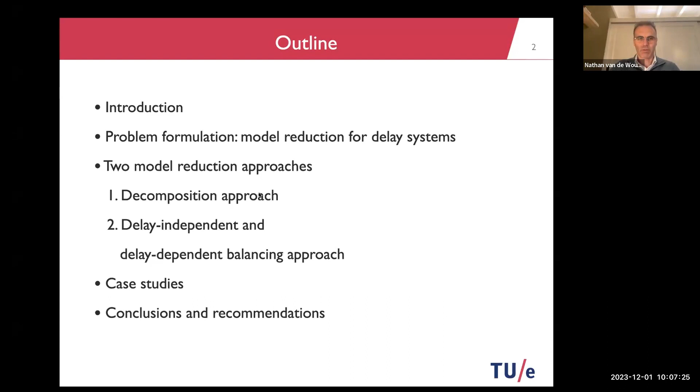One of them is manufacturing systems. High-speed milling and turning processes have been studied a lot in the scope of delay systems. I've been working quite a bit on drilling systems, which delay enters in exactly the same way, namely through cutting processes. In drilling systems it's at the bit, whereas in high-speed milling, it's the cutting process between tool and workpiece.

Another example that I've been working on a lot is networked control systems, where the delays enter through communication delays, for example between actuators and a controller, or between sensors and a controller.

Then in the drill string, you have high-dimensional models, for example, coming from spatial discretization of wave equations describing the vibrations of the drill string.

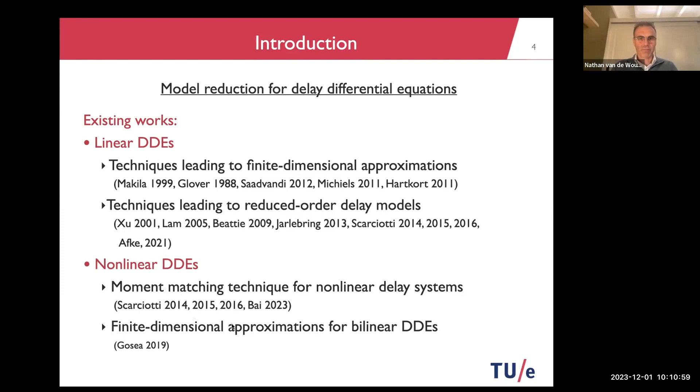Now, let me sketch the high-level problem that we want to tackle. We want to pursue model order reduction for delay differential equations, mostly focusing on linear retarded DDEs with constant delays, but also discuss some small extensions to a class of nonlinear DDEs with time-varying delays.

What is essential to us is that we want to preserve the delay nature of the system. We also want to preserve stability properties of the original system during reduction, and we want to provide an error bound, which means we want to be able to say something about the quality of the reduction.

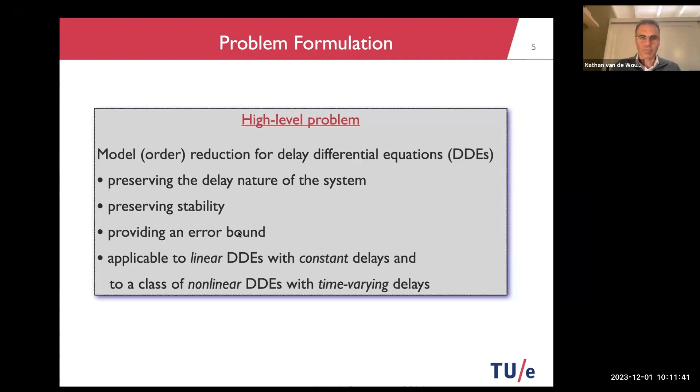Okay, then I want to discuss two distinct balancing-based approaches. One is a decomposition approach, which first separates the delay part from the finite dimensional part of the dynamics, and then actually employs reduction techniques for finite dimensional systems. And then still we'll try to say something about stability preservation and error bounds for the reduced delay system.

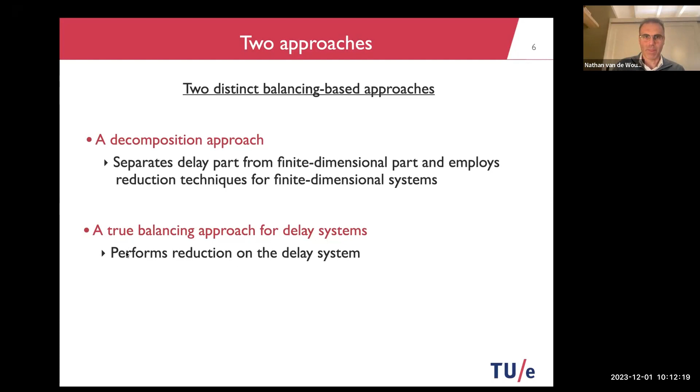Secondly, I want to discuss what I would call a true balancing approach, which really performs reduction directly on the delay system itself. Now, this decomposition approach, if you're interested, you can find more information in these papers, in which also Bart Besselink and Wim Michiels were involved.

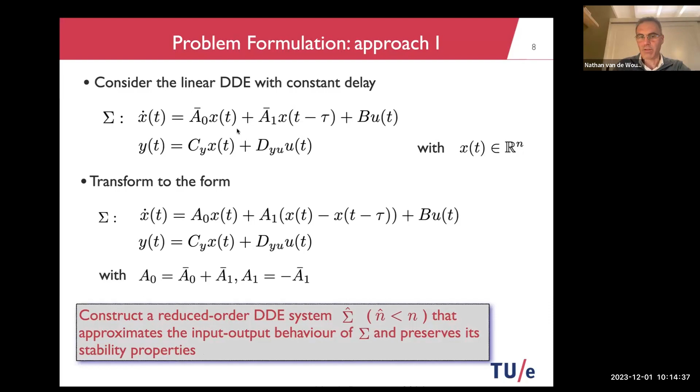Okay, now let me go back first. So what we're going to do first in this decomposition approach is to rewrite this linear DDE in terms of a feedback interconnection between a finite dimensional LTI part and a delay operator part.

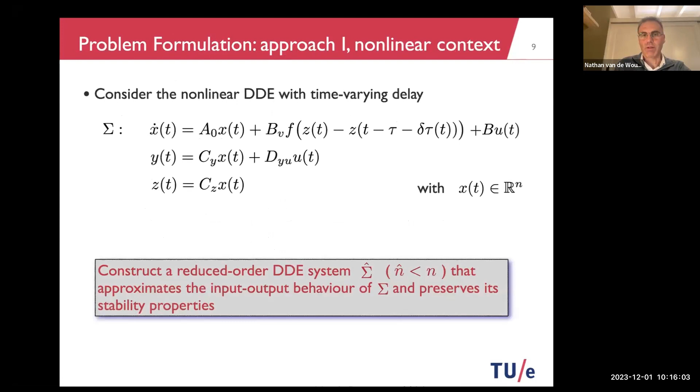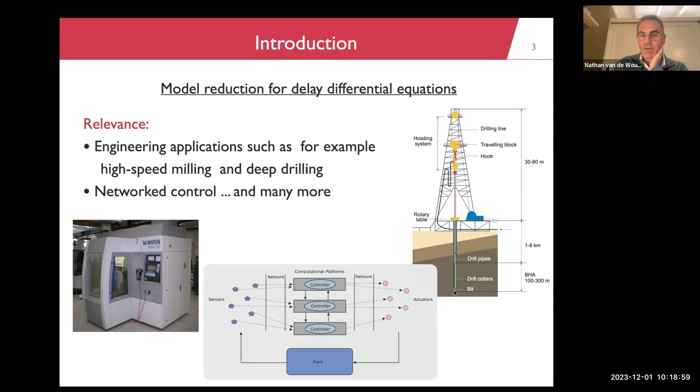So this actually inspires this approach where we only reduce a finite dimensional linear part and leave intact the nonlinearity and the part that induces the delays.

Excuse me, Nathan. Hello, this is Emilia. Sorry? I have a question. Probably I have missed something in the previous slide.

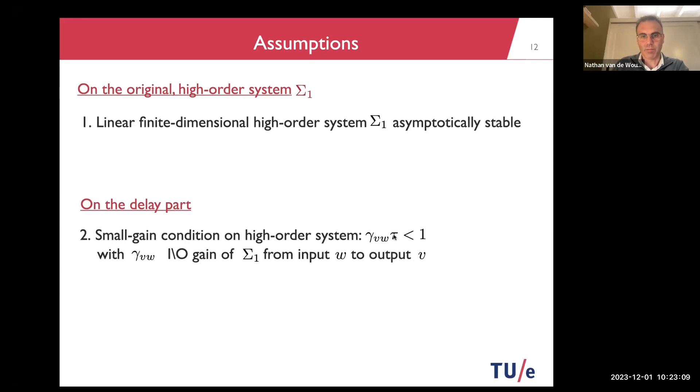The second condition is a small gain condition: gamma VW times tau is smaller than 1, where gamma VW is the input-output L2 gain of this finite dimensional part from input W to output V, and tau is the gain of the delay operator block in the linear case. So this is a small gain condition for this loop.

In the nonlinear case, we need a small gain condition of this form, where instead of tau you have L times tau plus square root 7/4 times mu. This involves L, the Lipschitz constant on the nonlinearity F, and tau plus this term is a gain bound for the time-varying delay operator, taken from literature, where we assume the time-varying delay has in absolute value a bound mu.

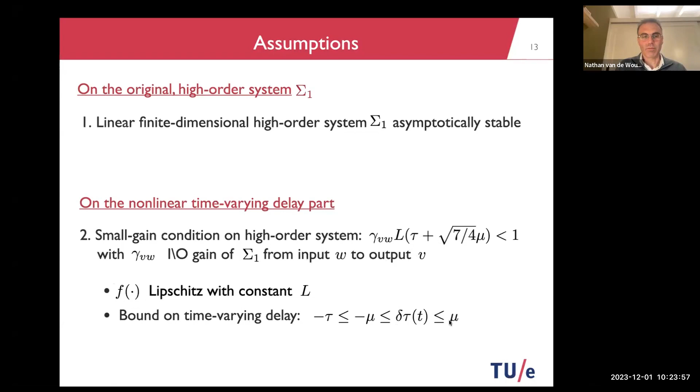This slide says more assumptions, but actually these are more conditions that we can easily satisfy. The third condition is that the linear finite dimensional reduced order system is also asymptotically stable. If you use standard balancing techniques, this is immediately guaranteed.

The fourth condition is that for this reduction of the LTI finite dimensional part, there exists an error bound. Here it's formulated in an incremental sense, but for linear systems that doesn't matter. Let me explain what this means.

These operators F are just operators from inputs U and V to either output Y or output W, so from both inputs to both outputs. And these epsilon are just errors between the output Y or W of the full order system or the reduced order system with a hat. So these E are just error operators.

What this equation says, if we went to a non-incremental version, is that we have finite gains from L2 signal norms in input U and V to these errors. And for balancing-based techniques, these error bounds are readily available.

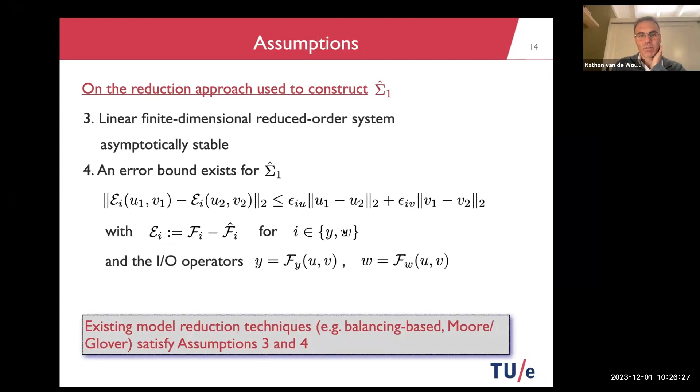Remember, we had gamma WV times tau smaller than 1. Now we have a robust small gain condition where epsilon WV plays a role - this epsilon WV is the error bound associated with the error made in the reduction of the LTI finite dimensional part from input V to output W. So this is just the reduction error made in the balancing-based reduction of the LTI finite dimensional part.

Secondly, so this is stability preservation - secondly, we have an a priori error bound. The error on the output prediction in an L2 norm is smaller or equal to some epsilon times the L2 signal norm of the input, where this epsilon, I'll give a more explicit expression on the next slide, is dependent on the delay tau, or also on this mu in case of time-varying delays, on the reduction error bounds of the finite dimensional linear part, and in a nonlinear case, potentially on the Lipschitz constant L.

But you can compute it a priori without actually performing the reduction.

Now, how does this look in the linear case? This is an expression of this error gain bound, depending on the epsilons. All the epsilons you see here are error bounds you can compute in case of linear balancing of the finite dimensional part. You see it depends on the gammas, which are just gains of the original high order system, and tau, which is the delay.

So two remarks are in order here. This error bound can be made arbitrarily small by making the reduction of the finite dimensional part accurate enough. So if you make all these epsilons smaller, all these terms become as small as you would want.

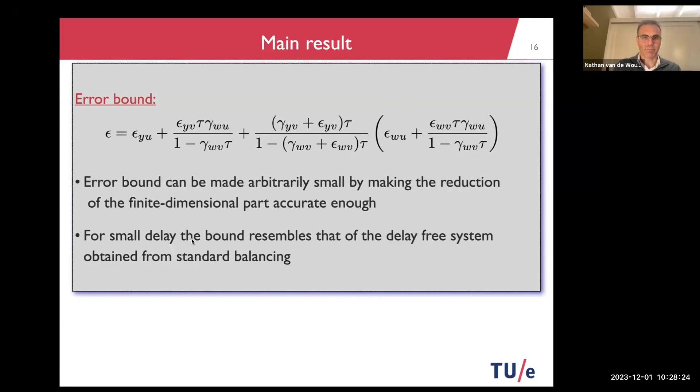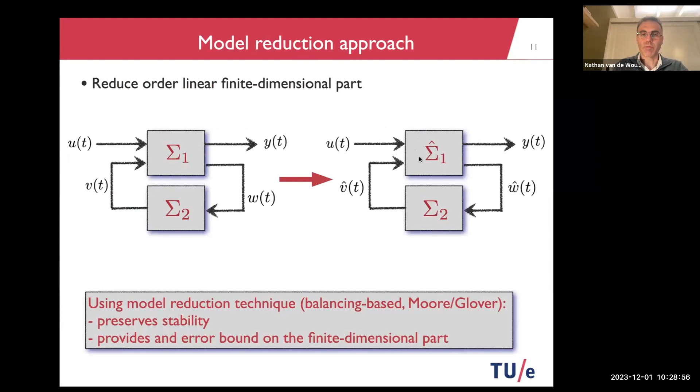Another remark is in order, because one of the goals I set myself was preservation of the original delay structure of the model. Now remember, if we go back, what we are left with after reduction is a reduced order LTI system in feedback interconnection with a delay operator. So this is the form of the system description we get after reduction.

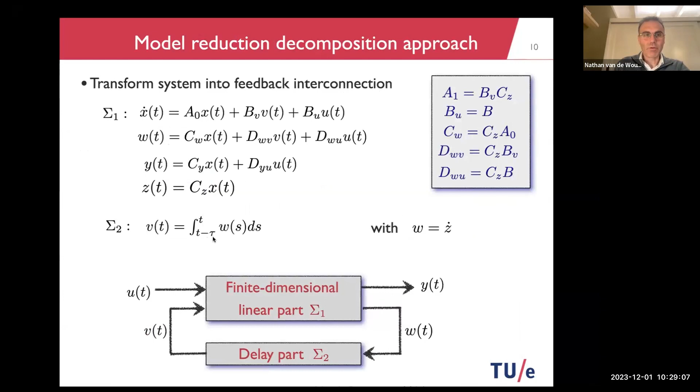So it's actually a system in this form. But we want to go back to a system of this original form. That's what this slide is about. So let me fast forward again.

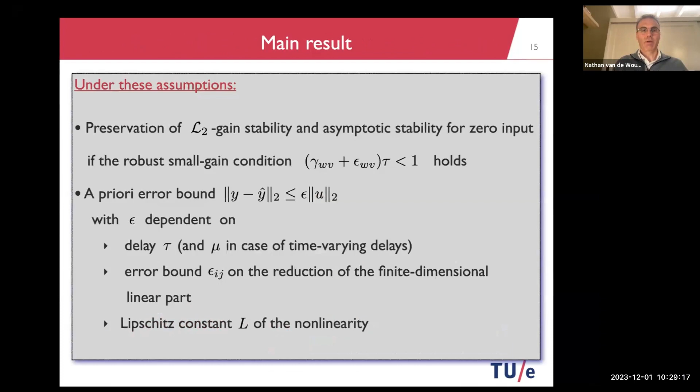For the linear case, the reduced order delay system in this feedback interconnected form can be cast into the original DDE form, or the same form as the original high order system, if the linear finite dimensional part is reduced using balanced residualization. This is a form of reduction by balancing using a singular perturbation-based approach, which makes the reduction exact at frequency 0. In that case, we can show that we can rewrite it back into the original form.

Now, for the nonlinear case, that's immediate, because the system in feedback interconnection form is actually immediately in the original DDE form.

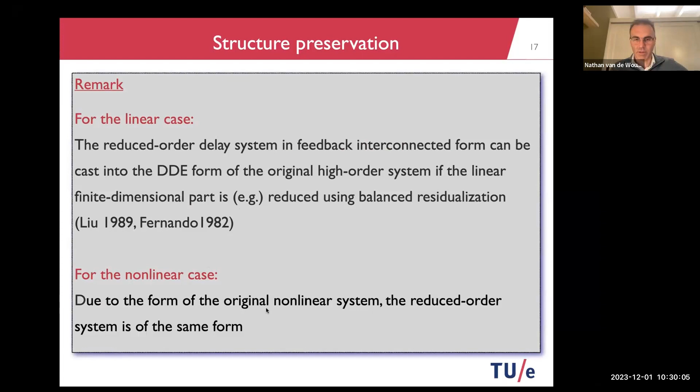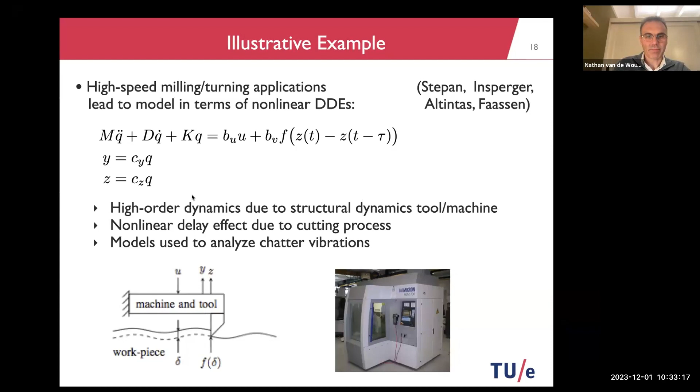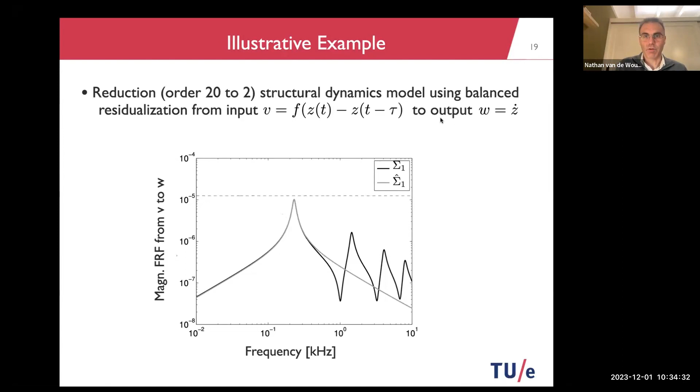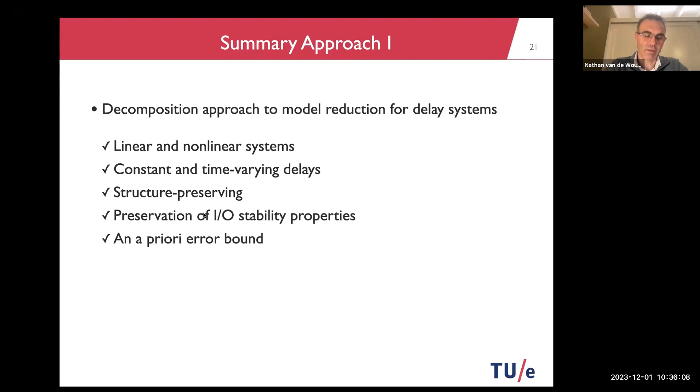So to wrap up on this first approach, this decomposition approach is applicable to linear and also some class of nonlinear systems, and to constant and in some cases time varying delays. It's structure preserving in the sense that you preserve the infinite dimensional delay nature of the system, and we have preservation of input-output properties, and can give an a priori error bound saying something about the quality of the reduction, and also give insights on what knobs you can tune in terms of the original dynamics, the delay, and the error bound of the reduction.

Now I want to go to a second approach, which is a balancing approach for delay systems. For those interested, your best reference would be this 2020 Automatica paper of a PhD student of ours, Sajjot Naderi, work together with Bart Besselink and Antoine Chaillet.

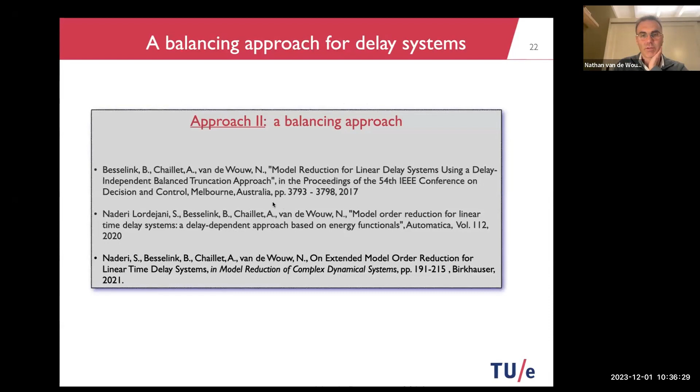I want to start with a delay-independent version of this approach as a stepping stone, and then go later on to a delay-dependent version.

Now the assumption we'll take is that this system is asymptotically stable as a basis for reduction, because that's a property we would like to preserve.

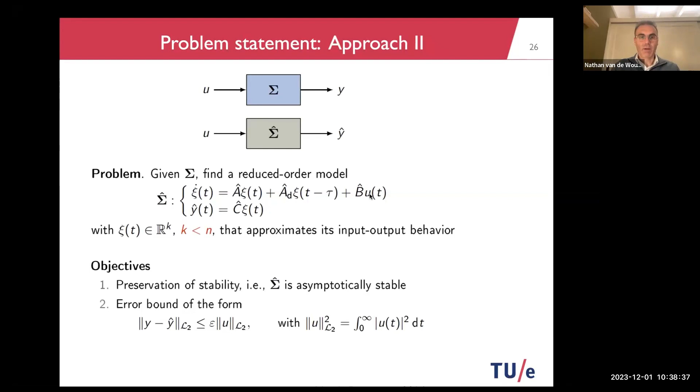Now, in this case, we're not going to do this decomposition into a finite dimensional part and a delay operator part. We're going to look at the DDE as a whole, and recall that standard balancing techniques for finite dimensional LTI systems are based on two key objects, which are two energy functions: an observability energy function and a controllability energy function. We'll do the same for delay systems here.

So the observability energy function tells you something about the output energy that you get if you set the input to 0 and initialize the state at the initial state phi. You initialize the system and just look at the output energy that you get. It tells you whether particular initial states lead to a lot of output energy, or whether you hardly recognize them in the output.

Now in this case, in the case of DDEs, it's not an observability energy function, but a functional, because it depends on these initial function segments phi. Because we have assumed our system to be asymptotically stable, it can be shown that this observability energy function is always bounded.

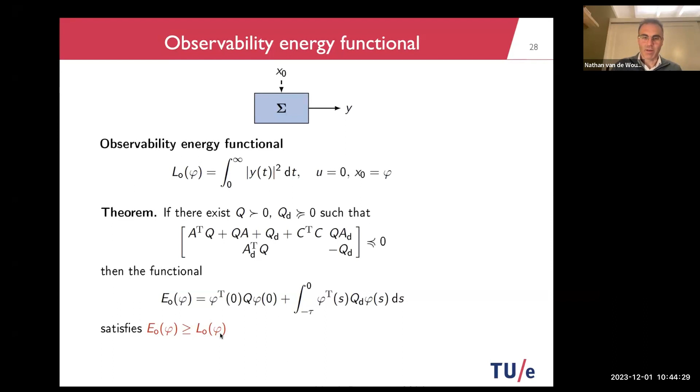And the same for the controllability side. Typically in standard balancing, you want to throw away states for which you need a lot of energy in the input to actually arrive at those states. Now, because E is a lower bound of L here on the controllability side, if you need a lot of energy in E, and so the energy is high for particular initial states, then you know also LC is going to be high, and it's best to discard those types of states in your reduction. So this is just more the intuition of how we're going to use these bounds.

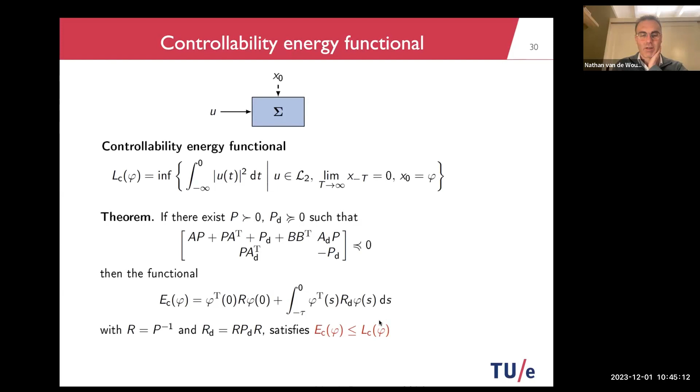Many of you might recognize these types of linear matrix inequalities from delay-independent stability analysis for DDEs, where we are going to use these for reduction. The main idea is to perform balancing, or at least what we'll call partial balancing, using these matrices Q and P, which are the solutions of these matrix inequalities.

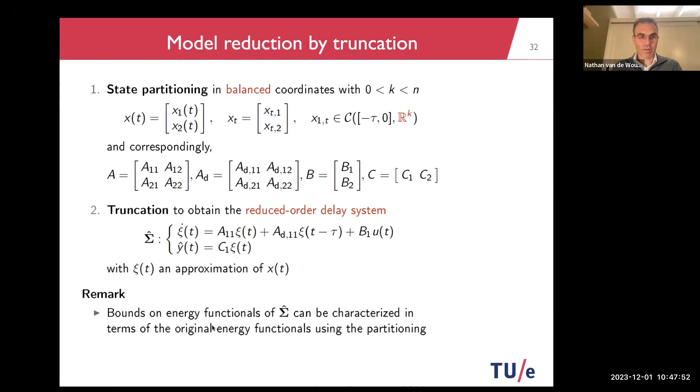But this is exactly the same as for balancing for LTI finite dimensional systems. If we do this, then we can guarantee that if we reduce in this way, the reduced order delay system is also asymptotically stable.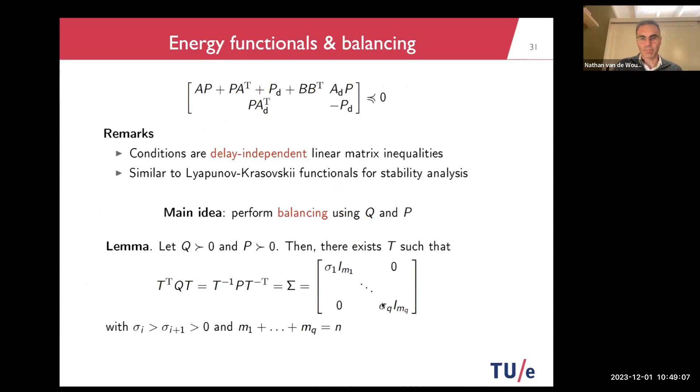And under the same condition, we can guarantee that the L2 norm of the error is upper bounded by the L2 norm of the input times some error gain epsilon, which is 2 times the sum of the discarded singular values - the singular values of this matrix that we discard by reduction. And this error bound is exactly the same as for the finite dimensional LTI case. But of course, we compute our matrices P and Q in a different way.

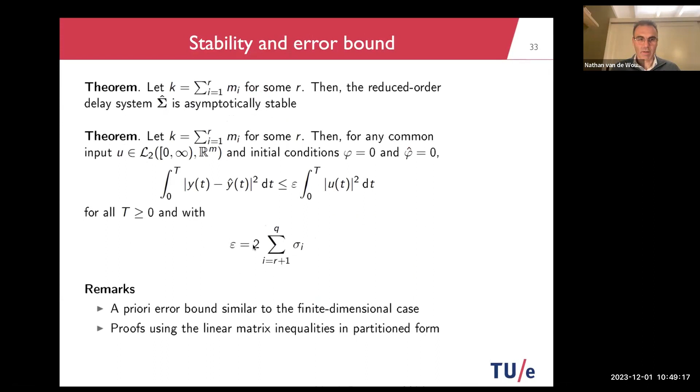Okay, let me go to an illustrative example, which is actually an example taken from a paper of Wim some time back, which is a partial differential equation where V is the temperature of a heated rod, X is the spatial coordinate, T is time, and it's just a heat equation for a rod with a distributed heating source and also some delayed feedback. And because of that delayed feedback, you see here a delayed term appearing.

Now, we have some boundary conditions, of course. We have a heat source at the middle, and the output is the average temperature of the rod over the spatial domain. And when we now do discretization of the PDE, we arrive at a model in terms of a DDE with 35 delay differential equations. And if we do the most extreme reduction to one delay differential equation, then for all the parameters given in this example, you arrive at this scalar DDE.

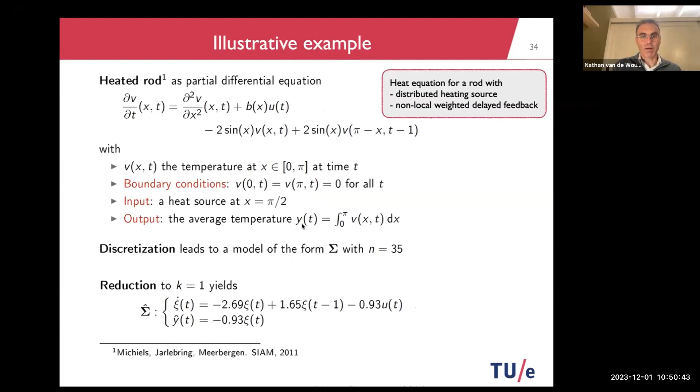Now, then if we look at the frequency response function from input U to the output Y, then the original model gives you this black line. Now, if we go back to the order 1 DDE, we get the red line.

And for me, this is a good example of the power of just preserving the delay nature of your system in the reduction. Because if we would have had to describe, let's say, the black frequency response function by any finite dimensional approximation, we would have needed a lot more orders to describe this type of behavior, which is just immediately well captured by preserving the delay nature of the system.

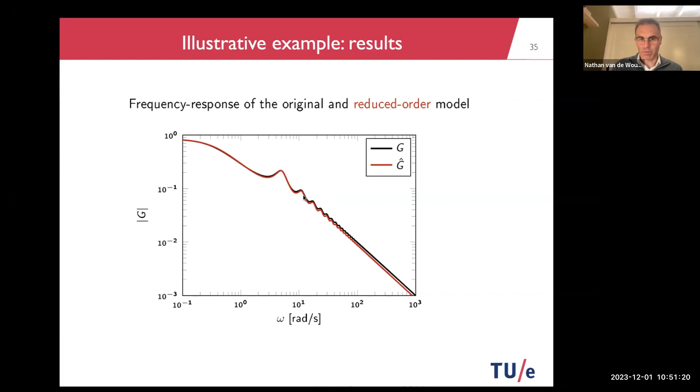Okay, if we look at the error bound, if we compute the error of the frequency response function between the original and the reduced order model, then the real error is given in black as a function of frequency. The error bound we computed is the dashed line, which is conservative, but not all that much. So in this case, it can actually be used as a measure for accuracy.

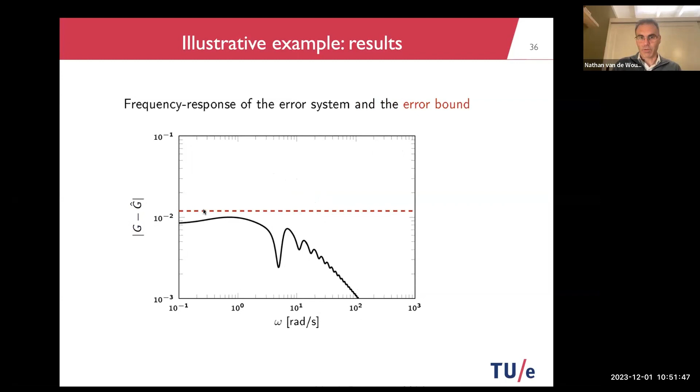Okay, so this is about the delay-independent variant, and now I want to introduce a delay-dependent extension to this. And I see I only have 5 minutes left.

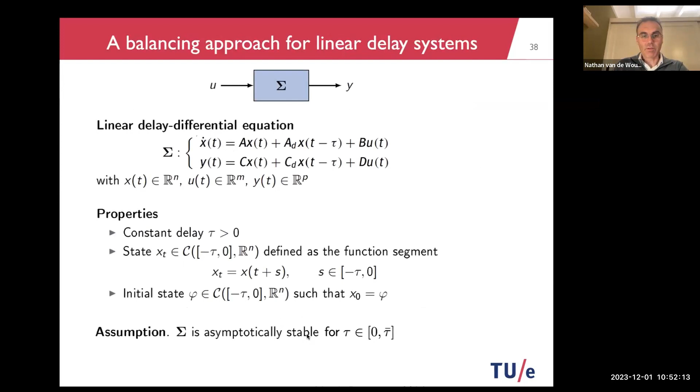So now we go to the case where you have exactly the same type of system form. In this case, we only assume that the system is asymptotically stable in some delay interval. And then we again need to characterize the observability and controllability energy functionals that I introduced before.

Which is again an upper bound of the original observability energy function. Similarly, for the controllability energy functional, we can find matrices P and PA and a constant alpha C, which are delay dependent, such that we can find a functional EC, which is a lower bound to the original controllability energy function. And now we can use these energy functionals in exactly the same way as before to construct a balanced form.

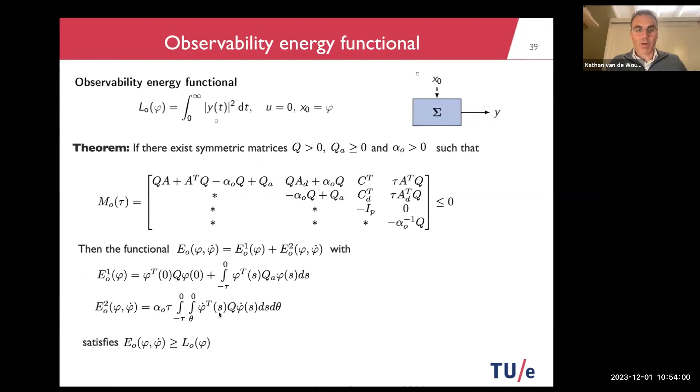Yeah, so we don't at the moment know how to use all these terms to arrive at some other form of a balanced form.

Now then, the reduced order system can be obtained by truncation, as I said before, and we have to realize that P and Q depend on the particular delay because the LMIs are delay dependent. So also this transformation matrix is delay dependent, and also the error bound will be delay dependent.

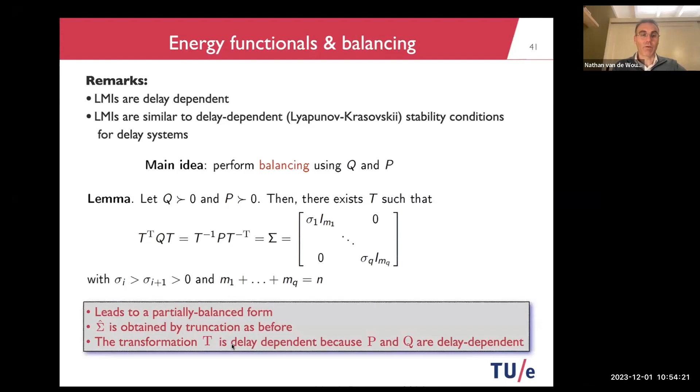And so then we get two results. First, if we put sigma in partially balanced form and this original system is asymptotically stable, then if we truncate in the proposed way, we preserve asymptotic stability. Secondly, if we satisfy these conditions and need a technical condition that these two alphas are the same, then we again have an error bound of exactly the same form as before.

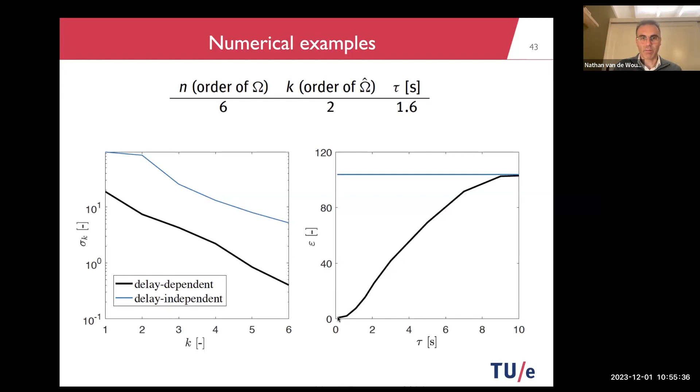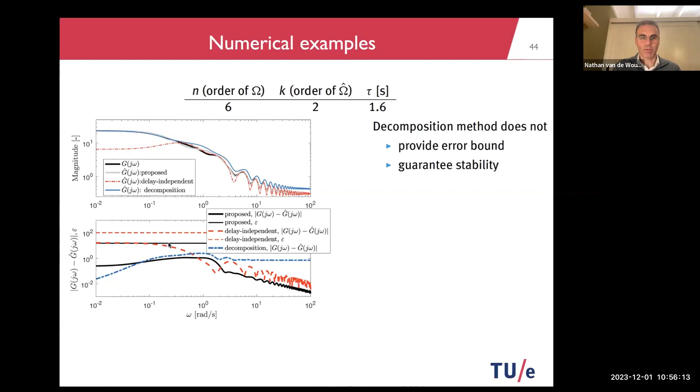Okay, let me then conclude. So we have discussed different methods for reduction of delay systems, preserving the delay nature of the system, preserving stability, and giving an error bound. There are also extensions to this approach for interconnected systems and robust approaches.